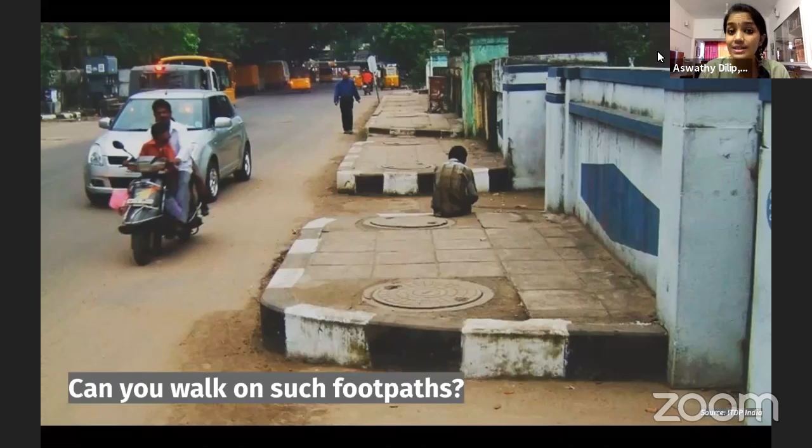So here, I'd like to put a poll to each one of you. The question we'd like to ask is: what are the reasons why most of you thought you may not prefer walking on the streets shown in the images above? Is it about discontinuous and broken footpaths? Is it about unorganized parking? Was it about the lack of sufficient lighting, or encroachment of footpaths by vendors, or just the lack of cleanliness? The results are coming up right now.

I really encourage all of you to take this poll. As I'm seeing, almost 85% of you believe that discontinuous and broken footpaths are one of the most important problems we need to take up. Next is the issue of encroachment on our footpaths, followed by the fact that they're unclean, and also the need to look at unorganized parking. Last but not least, sufficient lighting is also very important. Let me share the results with all of you.

Now, what if you looked at a street like this? What kind of imagination comes into each of your minds? How about walking on a street like this? Does it want you to stay here and spend a little more time out here? Stop.

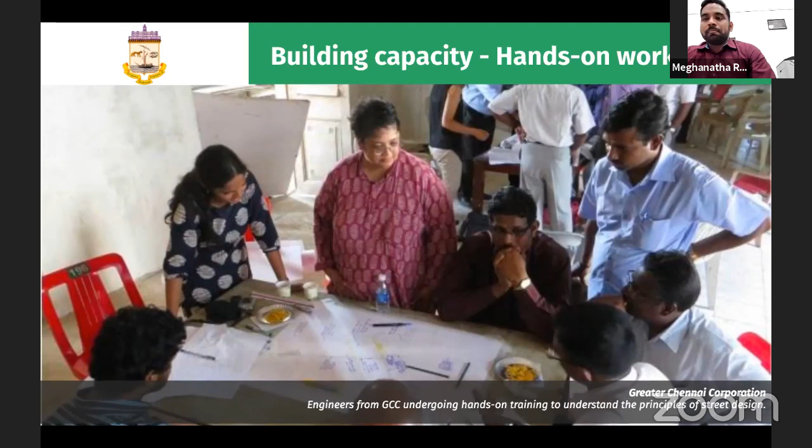Again, building on capacity building - the idea was to ensure it's not just consultants, engineers, contractors or builders who should understand the redesigning and reframing of streets. Our own engineers and officials should first have that capacity building and be sensitized about it. These are snapshots from that capacity building.

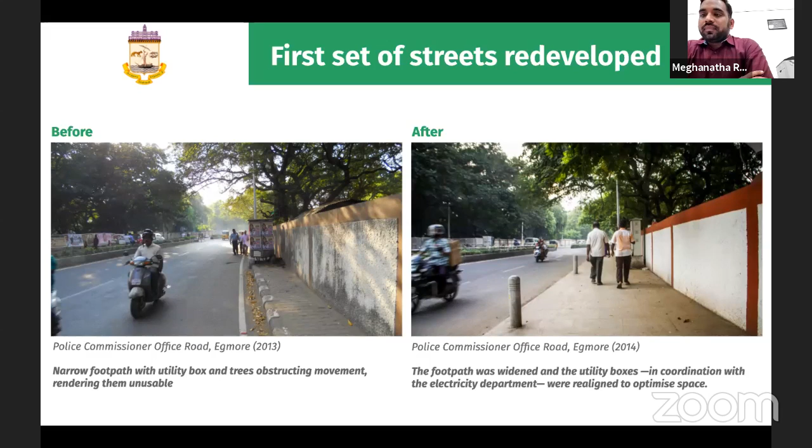Chennai, I must say proudly, has adopted the NMT - non-motorized transport - policy, and we are taking many steps and measures to fulfill our NMT goals. Since we adopted the policy back in 2014, we have covered almost 150 kilometers of streets that have been converted into complete streets.

One of the prime things we did was build people's support around our work. When we touch arterial roads, busy areas and business districts with set notions and conservative approaches to roads, you need to build support among the local public, so they are not just witnesses but stakeholders in the development of that area.

This is again about building support through the public - a snapshot from Mylapore, where we involved police, resident welfare associations and everyone. Another inbuilt concept along with the streets we develop is ensuring they are well connected to schools and access routes, creating safe roads to school, achieved again through community participation.

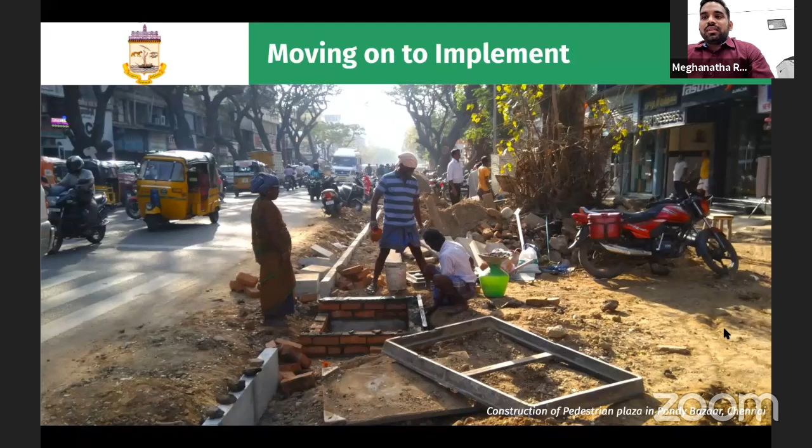This again at the same place, through negotiations, and then this is implementation. The phase when we started implementing it - you can easily see the way it was before. It was like the cars were almost near the shops. It was such a mix-up there.

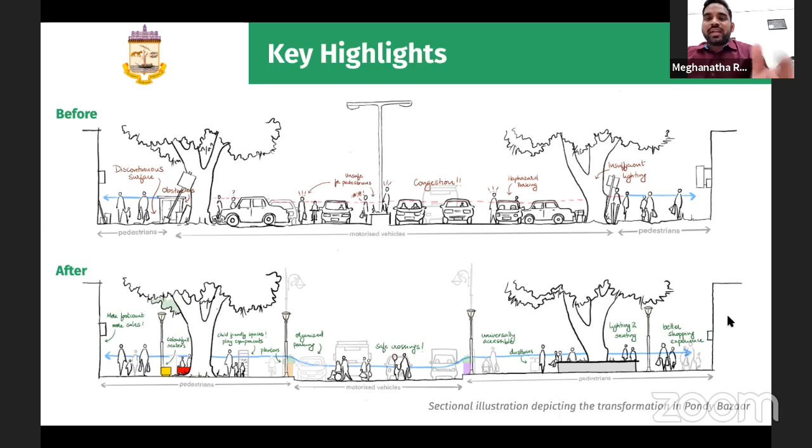But now everything is very defined. The path for the cars and vehicles is defined, and the path for pedestrians and citizens is defined very well there.

And of course, this is one thing we have always kept in mind: inclusive design for all. It should be something everyone should enjoy - all should have equal opportunity to go there and enjoy. We've also put in place a free shuttle service for all, with priority to people with limited mobility and all. It's running very successfully there now.

And vibrant street furniture again - that's another way to secure the streets. Otherwise, what would happen is we create spaces, people would come, and then people would encroach with petty hawkers and all. So the idea was to create these spaces so there won't be any future encroachment - play equipment, vibrant furniture and all.

So yeah, this is how you see it. If it is some festive season and all, this is like a must-visit place in Chennai now, with all its vibrancy and lighting. Of course, again, with tree cover and planters, as I said, it looks really beautiful. And again, with safer access to public transport.

And this is another thing which gels so very well with our concept of pedestrian design. This is towards one end of the pedestrian plaza - we have brought in the smart bike concept. We've all tried doing it ourselves, and it has been a fantastic experience. For the people coming in there, this is like an added advantage and attraction.

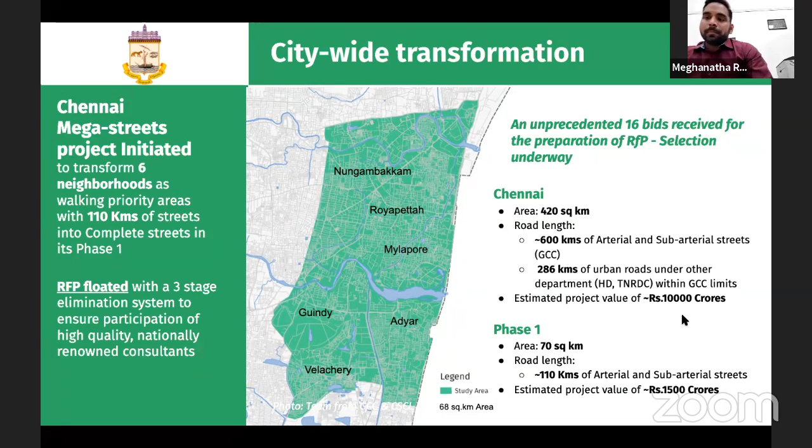One or two things I'd like to add: we've almost completed our proposals for the next 6 packages, 6 streets, 6 areas that we want to develop. We are bringing in quick wins wherein we can develop, but to begin with, as a pre-phase 1, we can develop a few, around 20-30 kilometers, in a big way.

As said in Pondy Bazaar's case, we brought in a pedestrian plaza, and many things came in along with it - for example, the smart bike. We're also coming up with an MLCP at the pedestrian plaza. This came out of the demand from the shop owners who saw the beautiful redesign of the entire street. This is how Chennai made it possible - it was clear public participation, citizen-driven and citizen-focused.

Thank you so much, sir, for showing examples of how citizen engagement is at the heart of this. At the same time, it's not just a few pilots, but actually transforming the entire city and taking systemic actions, like Kunal sir mentioned. It's great to see that in play. Next, I'd like to invite both Mr. Pradeep Bansal and Anuj Malhotra to present their transformation in Delhi. Over to you.

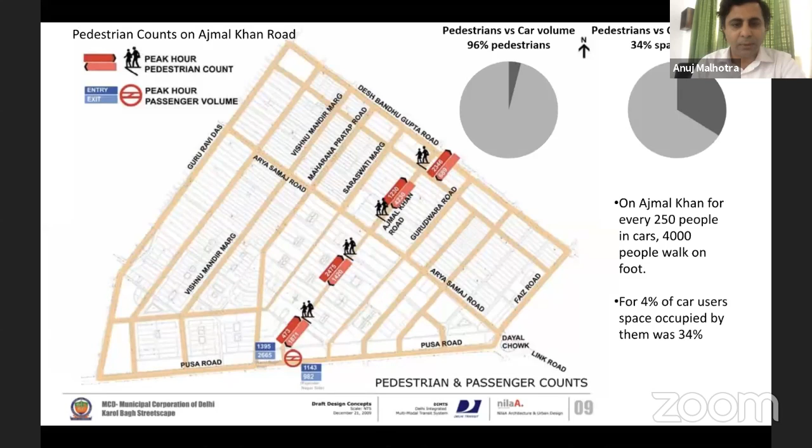This project report was done in 2009 by DIMTS and Nila, the urban design firm in Delhi. They worked out the figures and determined what needed to be done in this area. They found that Ajmal Khan Road, the prime artery of Karol Bagh, should be pedestrianized because 96% of people on that street were already pedestrians, and only 4% were in cars. Along with the proposal, they also worked out the traffic circulation pattern for the entire area. This was approved by the governing body of UTTIPEC and the Lieutenant Governor of Delhi in 2010.

Thereafter some trials were conducted, but for some reason it didn't go through. Then in 2019, North DMC took it up again themselves, and we thought we should first do a tactical implementation of this project, so that it has more buy-in from all the people, and we can bring in any modifications needed in the project.

To begin with the modifications, the first thing we needed to do - since this is a very old area with not much parking available - was to figure out where parking could happen, so the streets could be relieved of parking. All these new spots you see on the screen were identified - these are all the empty spaces, and some were given partly to parking, or the entire thing was given to parking, to multi-level parking lots.

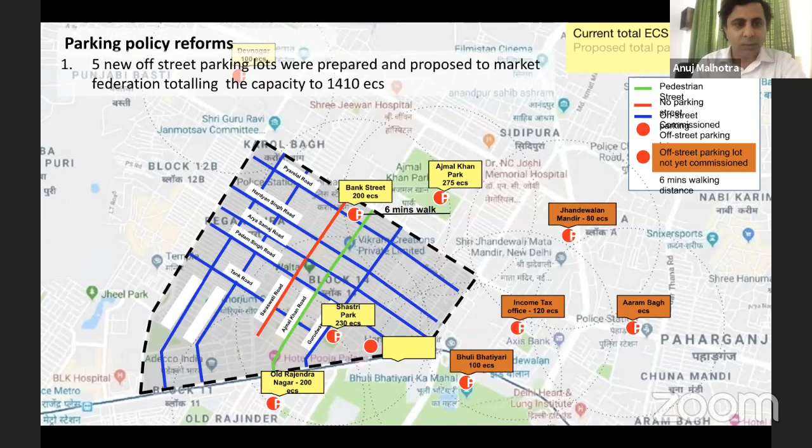After that, an MOU was also signed with the Market Federation. This is actually a huge change in policy on the North DMC side. Normally it's done by the department, but here the Market Federation was asked to manage parking in that area, so it was quite different in how it was done. The on-street parking fee was also increased from 20 to 40 rupees. These are pretty big changes.

The pedestrianization of Ajmal Khan Road, which we started with, was actually a vision presented in 2009. We began implementation with the entire team of PWD, North DMC, and traffic police. A combined team of around 50 officials worked on site through the night, for 2-3 nights initially, and we made a major transformation in the first night itself.

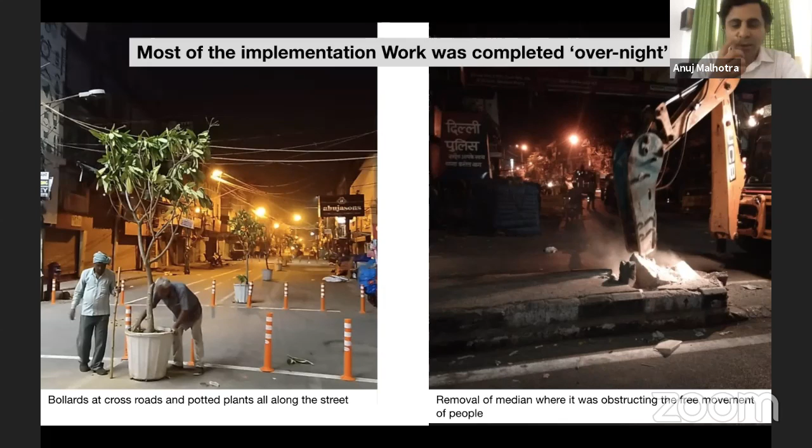People had never believed in their lives that this could happen on Karol Bagh, on Ajmal Khan, because all their lives they had seen this kind of street heavily congested. It turned into this with minimal intervention, which is only paint, some potted trees, and bollards fixed at positions. So the street was transformed by a simple tactical method.

This was not something done temporarily. The tactical method is still in place, very much in existence. It's been about a year now, more than a year actually, and the street is working perfectly.

It was such a joy to see how people started actually coming to the street, sitting next to the shops, with children and grandfathers bringing the children out. This was quite a sight. Elderly women could bring their wheelchairs, and with the benches, it became a space for everybody, irrespective of their income groups.

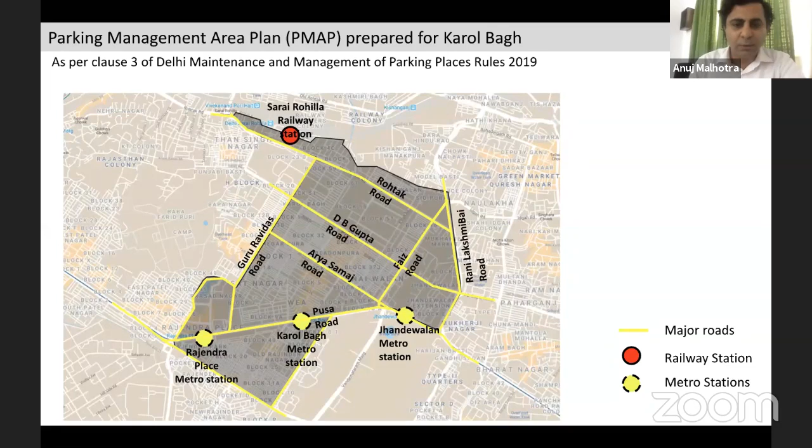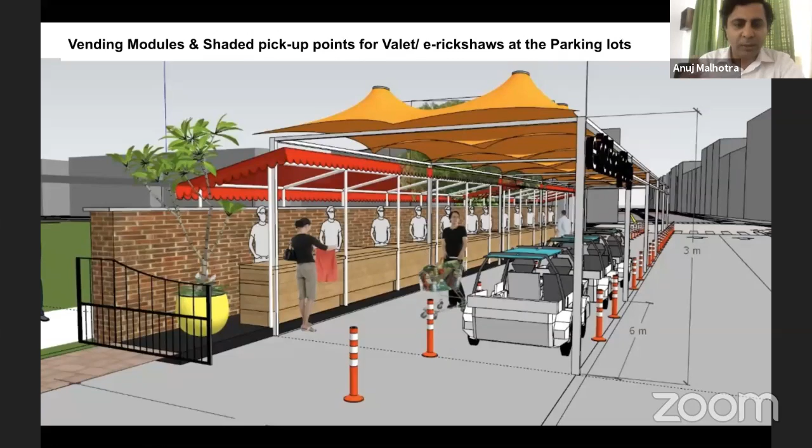Slowly we covered the entire Karol Bagh area for our intervention. With the Supreme Court asking us to look at a parking management area plan, Karol Bagh has now prepared a parking management area plan for daytime and nighttime parking. We also looked at the vendors, did conceptual diagrams, and implemented it. There is a town vending committee which is being kept in confidence. We have identified around 300 spaces all around Karol Bagh where vendors will be allocated, and that work is also going on in parallel.

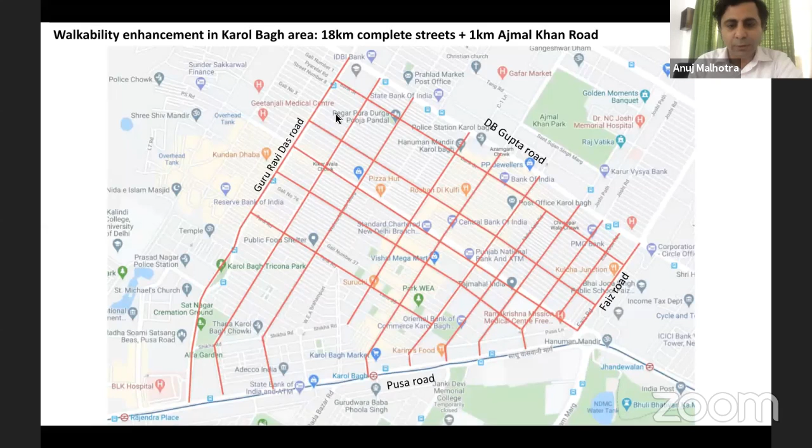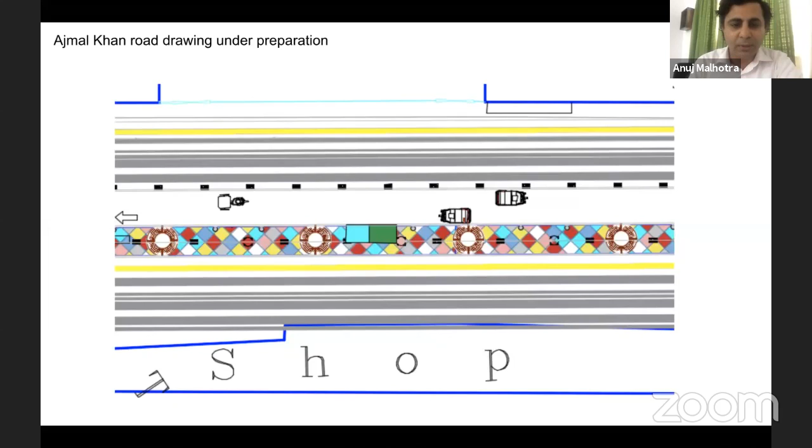So this is the plan for the streets. There are about 18 kilometers of it. This is Ajmal Khan Road, and now it will be a pedestrianized street. We had a beautiful art festival by the students. About 800 students came to paint this, and we are looking at the same pattern they created to make it permanent and part of the street design. So that will come, and you can see the sections which were done.

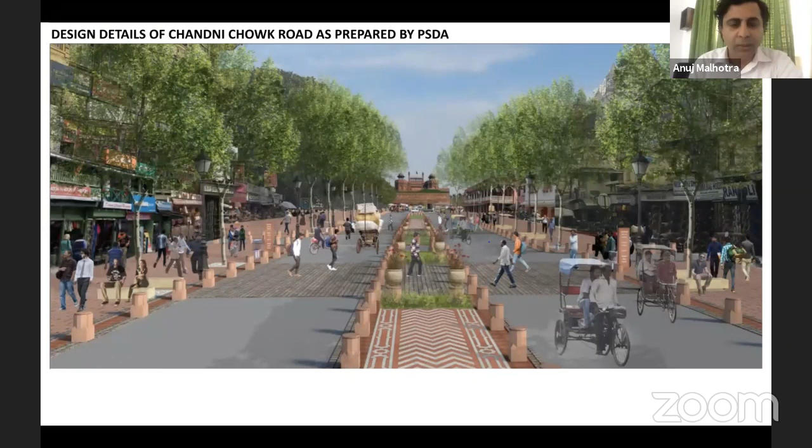So sir, isme bhi, now Chandni Chowk, as you know, is a very large area, and here the first project which was taken up is the pedestrianization of the Chandni Chowk road. This was done by the late Pradeep Sachdeva sir, who is a great urban designer based out of Delhi. He's no more now, but his legacy has been left. Now we have the Chandni Chowk road, which has been transformed into a beautiful pedestrian plaza.

And this is the transformation we are all aware of. But now, in North DMC, what we are doing is trying to integrate the transformation of Chandni Chowk road to the entire Chandni Chowk area, which means the traffic circulation, the pedestrian circulation, the goods traffic circulation, all of them will be taken care of for the entire area. So I'll just run through the slides.

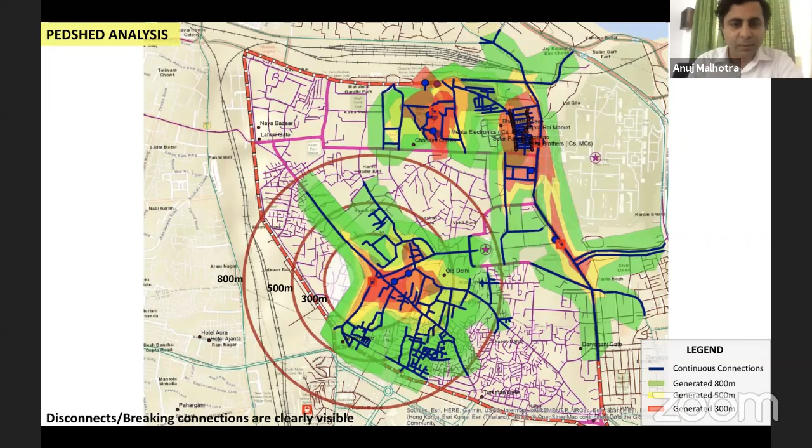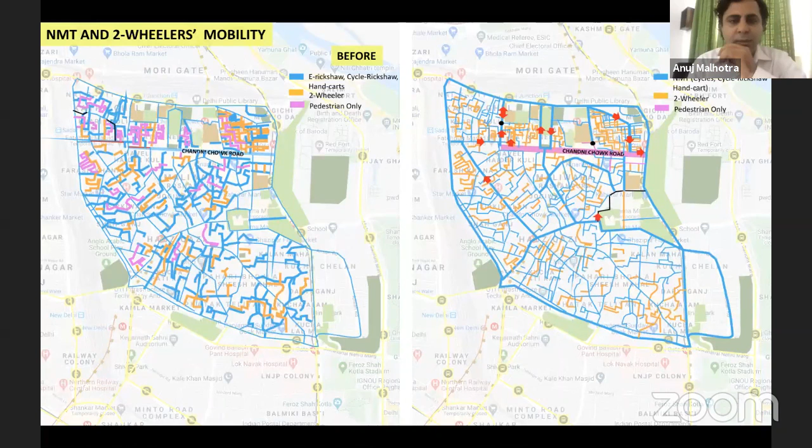So running through this, you can see the non-motorized two-wheeler mobility, the three-wheeler mobility, the before and after of four-wheelers and trucks. This is a composite map. All the blue roads you see are entirely pedestrianized streets, full NMT streets, while all the other streets of different colors are where the pedestrian movement has been widened to make it more walkable for the entire pedestrian area.

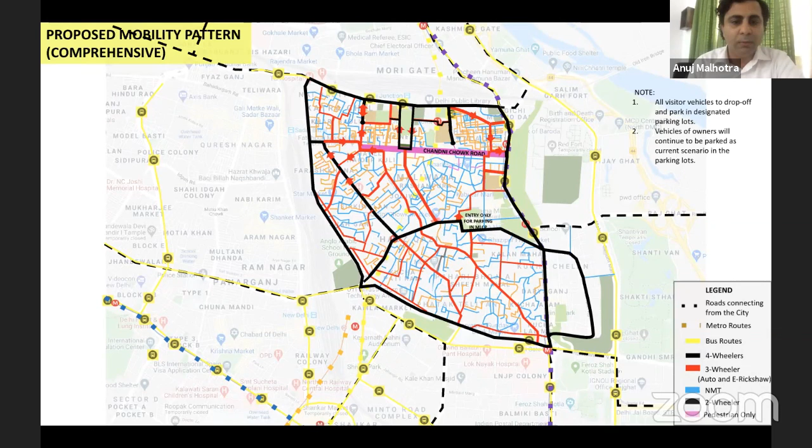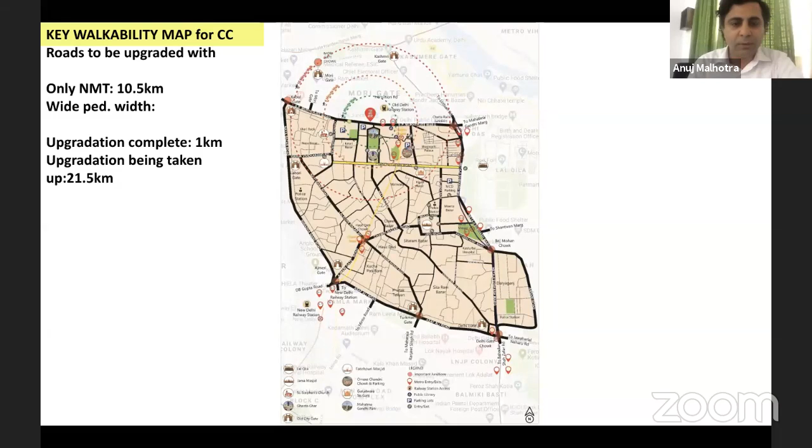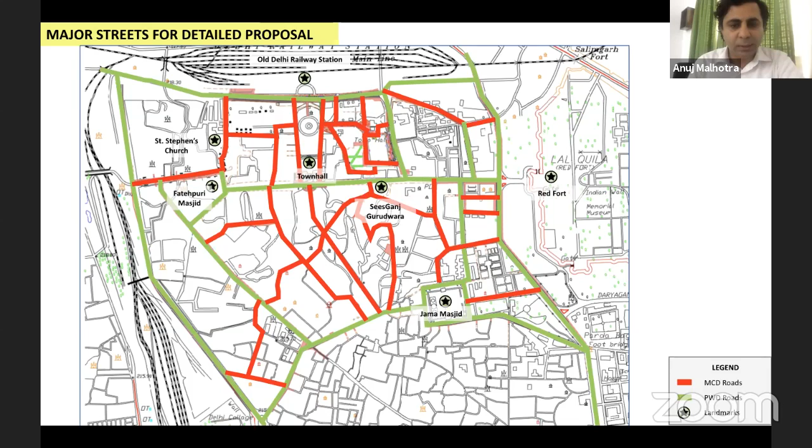So in the key walkability map for Chandni Chowk that we have just prepared, the only NMT streets will be around 10 kilometers, while the other streets will be around 21 kilometers, where walkability enhancement will take place. This is the composite map: the red streets belong to MCD, the green ones to PWD, and street designs have been prepared for all of these streets, with implementation now underway. So nearly 30 kilometers of streets will be getting transformed bit by bit in Chandni Chowk.

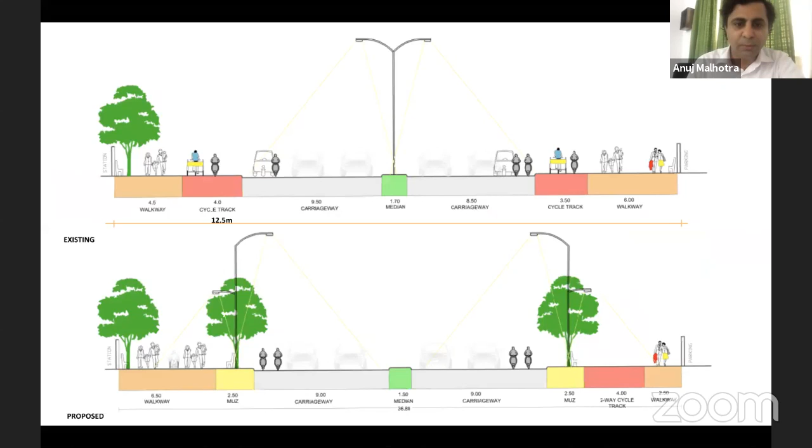The transformation that you all have shown is truly inspirational, especially because it is very much in line with the Streets for People challenge, where we are really encouraging cities to first try out quick and innovative measures, but then keep them for long, just like in Karol Bagh, and then slowly look at how it can be transformed into permanent interventions. Some of the very important pieces were different departments coming together, such as traffic police, introducing organized parking with priced parking, and engaging with students for designing this area. All of these are bang on for the Streets for People challenge. Thank you so much for sharing that.

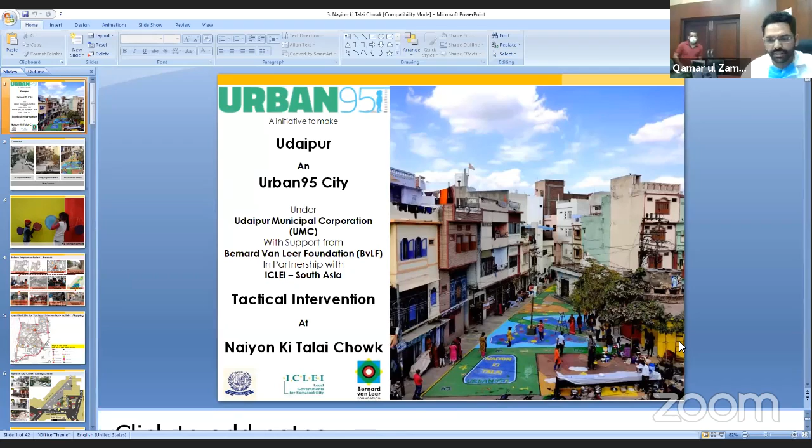So this was a pilot we did in the old city area, a very congested area, and we tried it as a pilot. Pre-implementation, major challenges were that parking was very haphazard, with street lights and poles everywhere, as you can see in the first photo. The second photo shows what we did during implementation, and the last shows what we achieved.

This is one thing we implemented on the wall of the temple. It was just a very shabby wall, and we colored it, then put springs on it so children can play. So this is how we did it.

First we did the site selection, then activity mapping, and then looked at what all is surrounding the site. Then we did stakeholder consultation with the commissioner, deputy mayor, mayor, and everyone from the city, with colleges and students and Anganwadis, and with vendors who can give us the material.

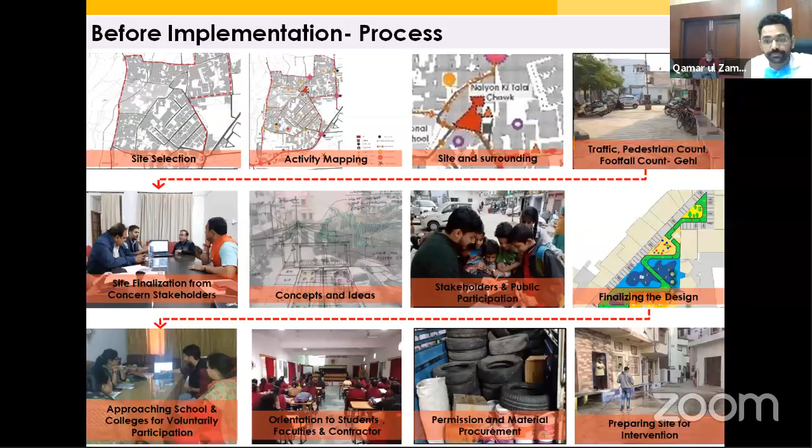This is a general plan of this area in Naiyon Ki Talai. This area is besides the Pichola Lake, one of the famous lakes of Udaipur, and this is just a neighborhood inside the old city. Whenever you move through this area, it is very difficult to move.

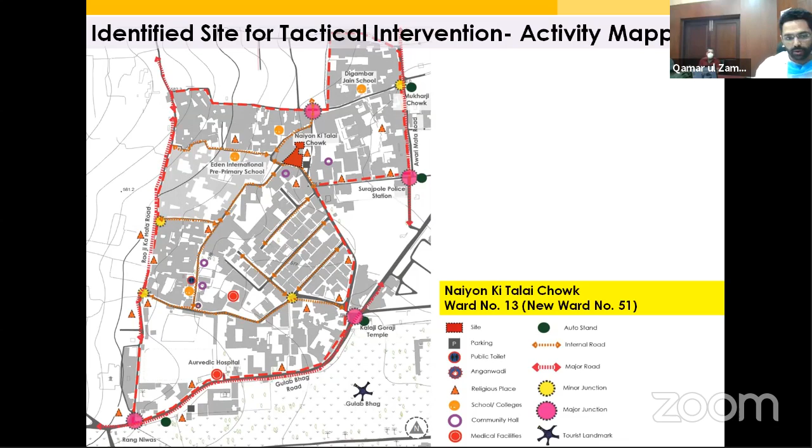Now if you go to that area, it is properly planned, and this is how we selected this site. As I showed in the first slide, there were electric poles in between, and that's how we came up with this street in the Smart City project. We have another project, the integrated infrastructure project, through which we made this street pakka, and now it came up as a concrete street.

But what we missed was removing these poles, arranging the parking, and figuring out how we can actually beautify the street. That's how we came up with the concept of Ghar, Angan, and Sansar, and how we can integrate all these things.

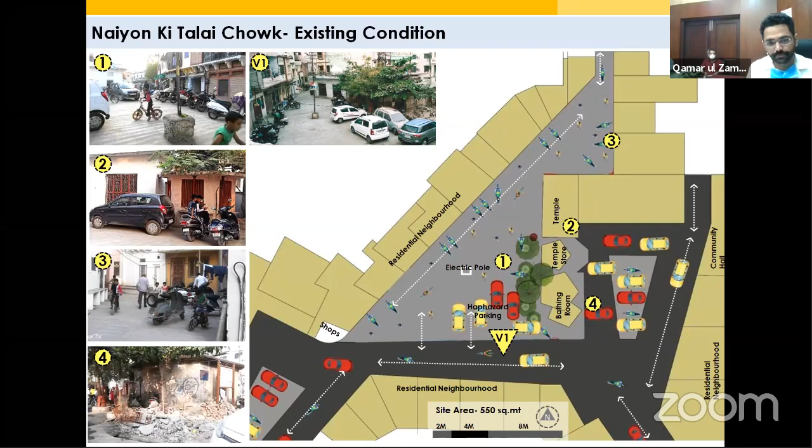So this was actually a photo if I show you. Residential buildings are there, and a lot of debris was there. You can see the parking. So these are the challenges which we actually identified.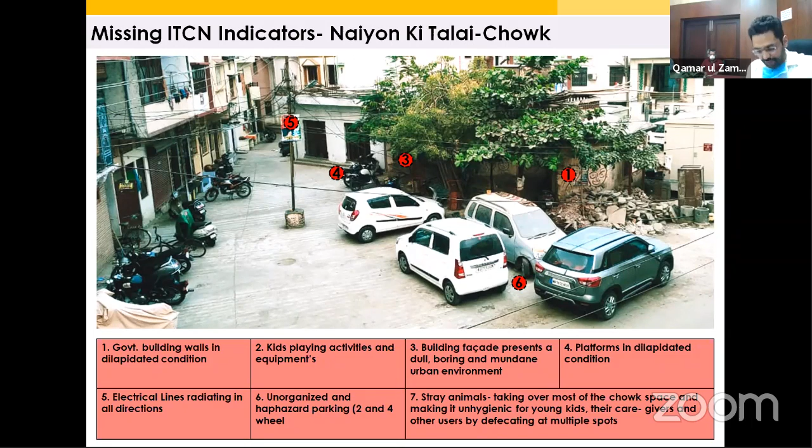So this was the plan. If you can see to the extreme right, it is a green jungle type theme. Then the green one is the river flowing, and to the extreme, where organized parking is written, we have hills and mountains. Then moving down, along the river, there is a play area and a pool area. So it's just a theme which we took: at the top, it is an imitation of jungle, then a learning track and playful tracks.

Then towards the right, what we did was there was a temple, and the temple walls were really shabby.

So we actually painted it, and fixed some fixtures for the kids so they can play with it. Then there are some lawn games, interactive games for kids, and local games which we put in there, like Langdi Tag or other games we play in North India.

And this is how we put spinning wheels on the wall of the temple. And to one side we organized the parking so that it's also included in the plan.

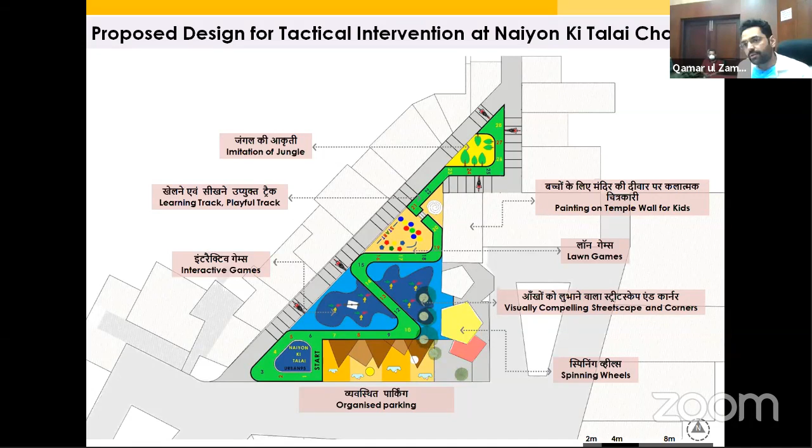So this is the stakeholder consultation with the commissioner, the deputy mayor, mayor, chief engineer, and stakeholders of the area. You can see the pictures, done during the day and during the night, to see the challenges we face in the locality and what is needed.

So this is with the students and volunteers we were trying to include for implementation. This is the actual implementation which started. This was the form before the implementation, and this is site cleaning and everything we did.

So these are the four major things: transforming the Chowk into a vibrant, safe, interactive and engaging space. Second, community level interactive space, where old age people and ladies can come to the street, sit, enjoy, and interact with each other. Third is learning-cum-playing, where students can learn from their games. And the fourth is organizing the limited space for multiple uses.

So this is during the implementation. We did most things with volunteers, and on the left you can see on-site orientation of the students and then on-site implementation. So this is how we did it.

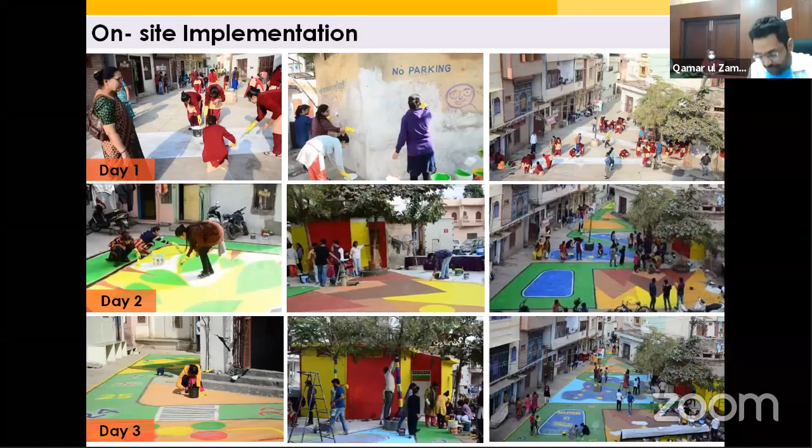So this is something we did with ICLEI and BvLF Foundation. This is on-site photos of the team. This is what we achieved finally.

So I'll just go through: learning track is there, organized parking is there, spinning wheels are there, lawn games are there, interactive games are there, imitation of jungle is there, painting on the temple wall for kids is there, and visually compelling streetscape and corners is there.

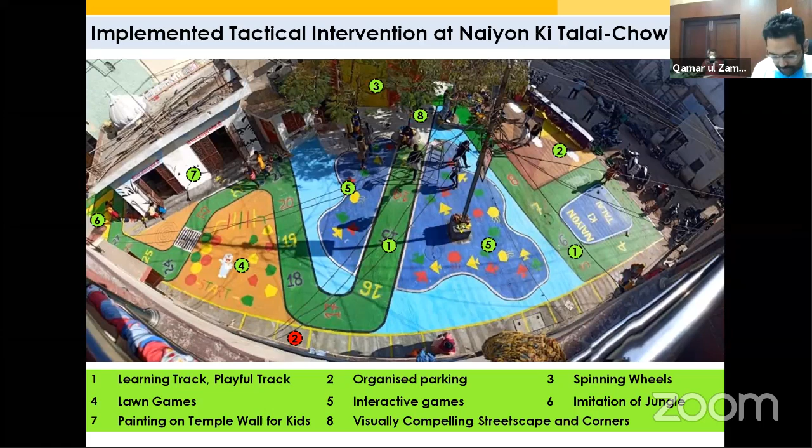So I'll just skip ahead. This is the media coverage. This is post-implementation, showing how kids are enjoying it. And this was mainly the impact assessment of the street.

So these are the public discussions held after implementation for impact assessment. You can see how the street came up and how people are enjoying it.

So these are the results we found for the 4 interventions. First, for transforming it into a vibrant space, 92% of people were satisfied. 77% were satisfied that it is a community level interactive space. 85% for learning-cum-playing, and 64% for multiple use.

This is the stakeholder interaction, and the interaction with different officials and public figures. This is the sensory mapping survey. This is on-site photo documentation. This is what we can see before and after.

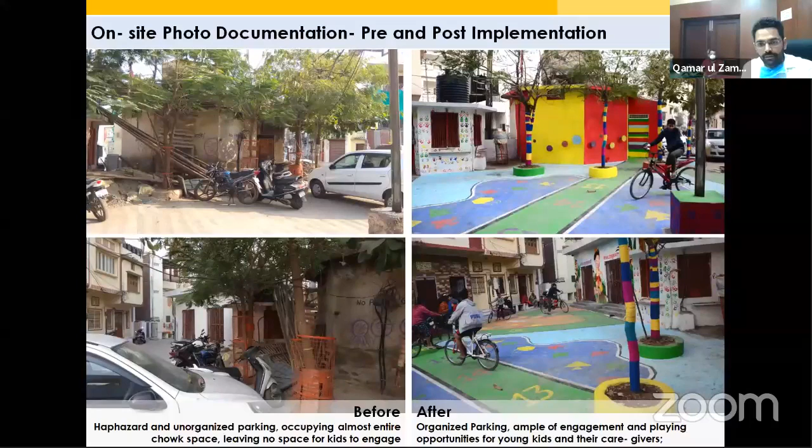Just rushing through the photos - this is the temple, and this is what we achieved. This was the first pilot which we did.

Now we are planning further, and with this Streets for People Challenge competition, we are trying to extend it to other roads and major roads of the city. Thank you so much.

Thank you so much, sir. It was really nice to see your intervention in Udaipur, especially because you've really focused on some of our youngest citizens, who most often get left off when we think about planning for our cities, and you put them right in the heart of your transformation. It was fantastic to see this.

Now, while we've seen this great work by all 4 panelists, we must know that while they might not have spoken about the court cases and pushbacks they probably got from stakeholders, invariably there are these pushbacks that we have to proactively take a stand and engage in negotiations with all our stakeholders. So today we don't have time for a question answer session, and we will quickly move to the presentation of today.

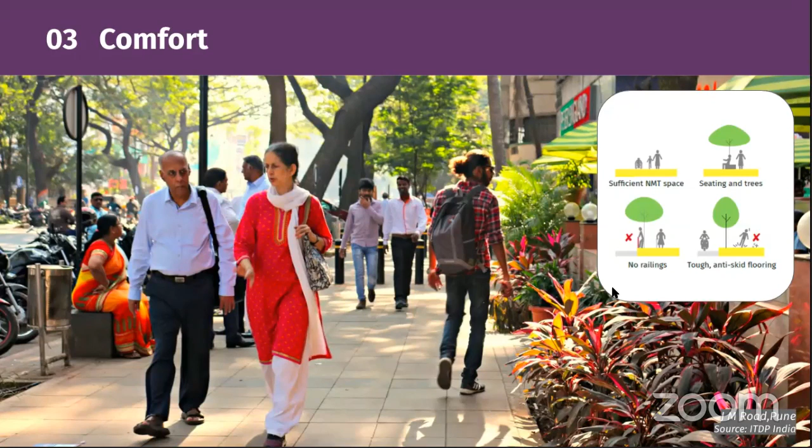Fourth, are we being sensitive to the local context? Are we engaging with local people, seeing what kind of activities are already happening in that area, and bringing them into the design rather than placing something alien in that context?

Fifth, are we making it livable? Are we bringing in a variety of elements like play elements? Are we ensuring this is inclusive? Do we have active edges? Do we have street vending integrated with the whole idea? You saw many of these included in our four example cities earlier.

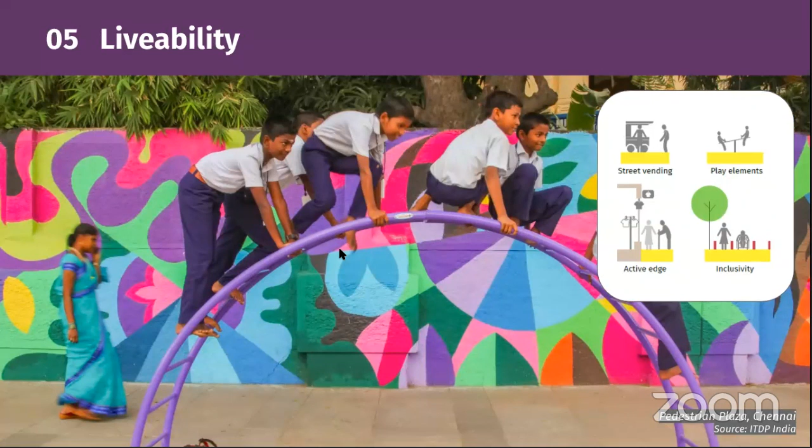Last but not least, are we ensuring that through the process we are also ensuring environmental sustainability? Are we creating a better microclimate? Are we using sustainable materials for this, etc.? While this challenge is about creating these ideas through tactical urbanism, which are quick interventions, the eventual goal is that after establishing the designs, you also take it to the next level and make it permanent using all these other components as well.

Those are the six principles that you should keep in mind. And when you do that, you actually get streets that are safe, healthy, and happy for all.

So what is this challenge approach? The goal here is not assuming that you know everything, but instead test, then learn from the tests. And then once you have those insights, use them to scale in a much larger area, potentially across your entire city.

So the idea of test, learn, scale is something our cities in the Cycles for Change challenge have embraced. It's great to see this process where rather than assuming we know everything, we are instead working with citizens, trying out various ideas, learning from them, and eventually making sure this becomes the new norm and scaling it. So the challenge has two stages, stage 1 and stage 2.

In stage 1, cities would not only test pilots, but along with it, they would also create a plan for scale up. Cities shortlisted at the end of stage 1 would graduate into stage 2, and get intensive support to actually do the scale up.

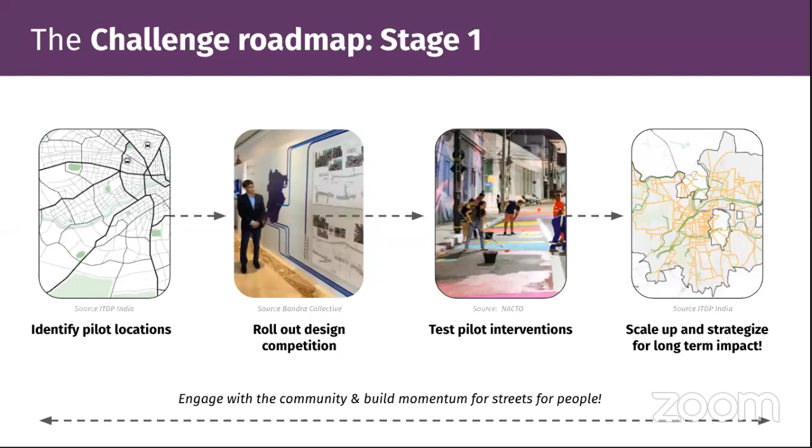Today we are going to focus primarily on the very first step, which is identifying a pilot location, or not one, but actually 2 pilot locations. What do we mean by these 2 pilot locations? Let's look at them. So what qualifies as a pilot?

A pilot would include 2 components. One is a flagship public space project, typically an area with very high footfall. It could be a big market area in the city or a large transit hub, where you would look at substantial pedestrianization. You saw some examples of that kind today from Delhi, Amritsar, etc. These are key market areas or a heritage precinct, or potentially a transit hub, where you would substantially pedestrianize that entire area.

The second is about creating livable neighborhoods. Not every part of the city has high footfall - they're not market areas, but residential neighborhoods. They might be mixed use, but primarily residential. So what can you do to make these neighborhoods also streets for people, where you have elements of livability and safety, all the principles we spoke about? How do we make that happen?

So a flagship typology could be a market, real estate, or retail area, or a heritage area - and typically heritage areas also tend to have markets in that precinct. Second typology is a transit hub. And third, maybe you have a different typology we haven't thought about - please send us your suggestions so we can include such typologies in the possibilities. In terms of neighborhood typologies, we have 3 in mind.

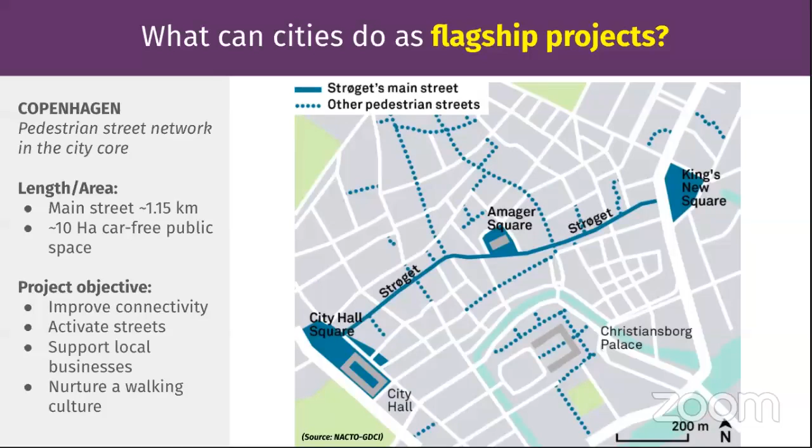And with the goal of improving connectivity, activating streets, supporting the local businesses to bloom and nurture a walking culture in the city. And subsequently now, over the last few decades, Copenhagen has been creating pedestrian-friendly environments across the whole city. Like you can see on the left is this main arterial which was cutting through the old city, which is now not only completely pedestrianized, but they have a whole series of other smaller lanes, by-lanes, which are also completely pedestrianized, or walking and cycling only in these areas.

The second kind of flagship project that I mentioned is essentially transit hubs. Transit hubs are where a lot of people are walking. They might be coming to the transit hub to pick up a connect to a public transportation mode. Oftentimes they are also intermodal facilities, where you might get off a bus, get into a metro, or get off from one bus to the other bus, or change from a bus to maybe a smaller vehicle like an IPT, a micro-mobility mode. So what could you do in that area to facilitate this multimodality, but also create public space?

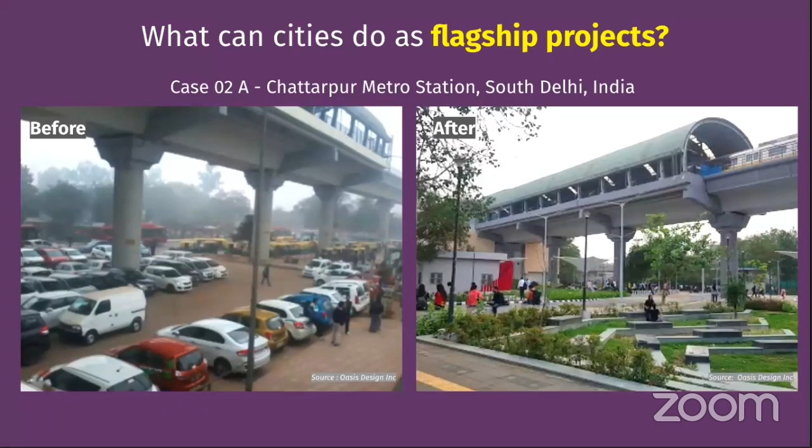This example is from Chattarpur Metro Station in South Delhi. Delhi has been doing some great work in the whole public space arena. What they've essentially looked at is an entire catchment area of about 7 kilometers. What they have done so far is essentially the station area, about 300 meters in length, but they have plans to now expand it to the whole catchment area and see how they could create a truly walking friendly environment to access public transportation. That's the other flagship.

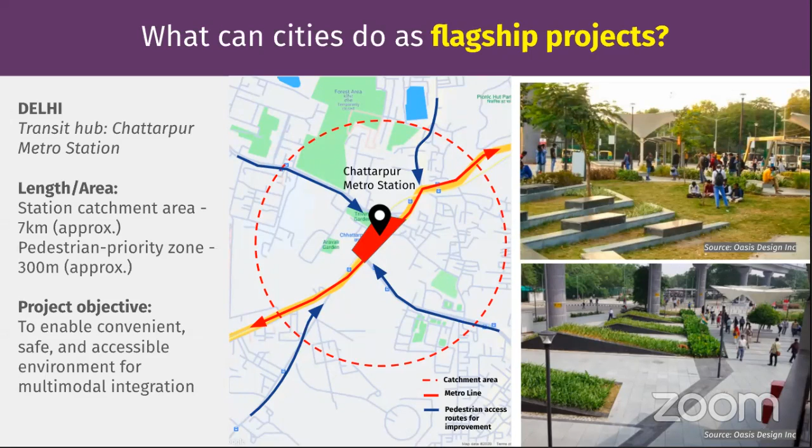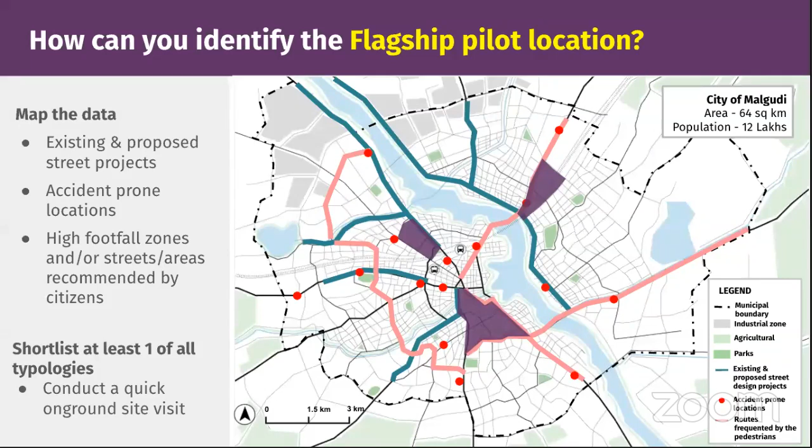Let me quickly go to what and how would you identify what your 1 flagship location might be. So maybe you're already working on some cycles for change corridors. Now start looking at what neighborhoods also you could choose. You might have a couple of options and look at a place where it might be relatively easy to implement, but also has high impact, strong citizen support. And when I say citizen support, in a flagship especially, it's essentially market associations locally and others who would be there to assist you, support you in implementing it, and the potential to cater to a wide demographic.

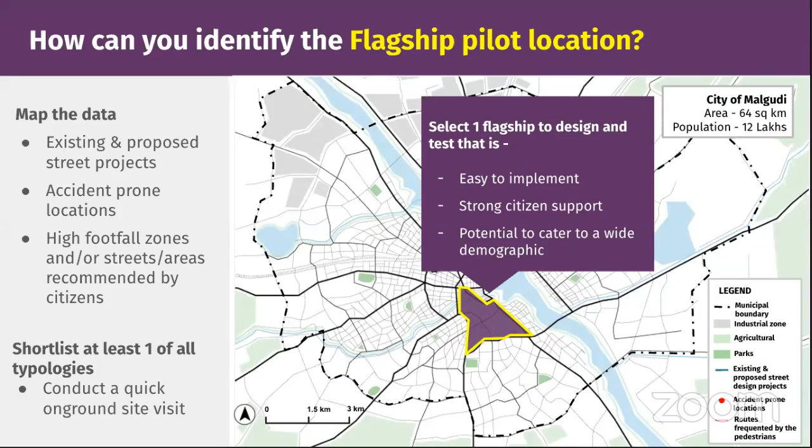The second typology I spoke about was neighborhood locations, which are localized in nature. Streets are relatively narrow, with a mix of age groups, similar to what Udaipur showed today, as against Delhi, Amritsar, or Chennai, which were more the flagship variety. In this case, you're looking at a neighborhood.

Make sure you're looking at schools, local shops, bus stop access, local parks, and how you would integrate them with the street network to make it safe for people and pedestrians. Look at mixed income neighborhoods as one typology, resettlement colonies, unplanned income neighborhoods. Try to identify at least one of each of these typologies. While you would pick only one for now, keep in mind that eventually you should look at all these typologies in the future to transform.

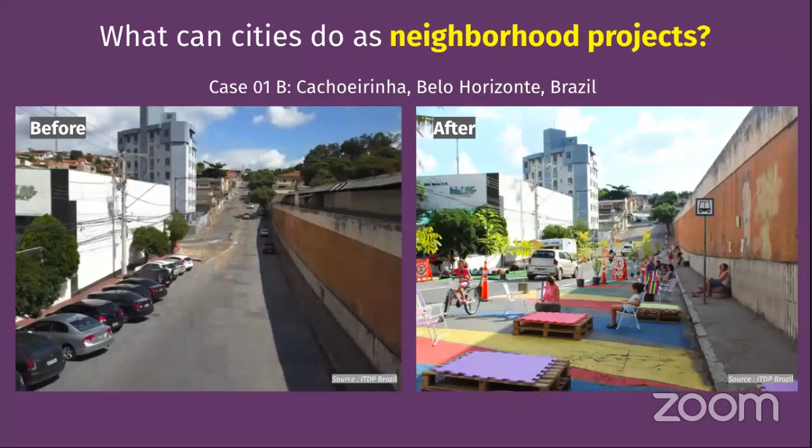So again, a few examples of what cities have done. This is the case of Belo Horizonte in Brazil, where they took a dead area of a neighborhood and started transforming it, which has a school area in the locality. They made sure they were doing this with the local citizens so they are part of the development of the design itself. The area is not only safe during the daytime but also at nighttime, because of the kind of activities they've been organizing to make it a nice place to be.

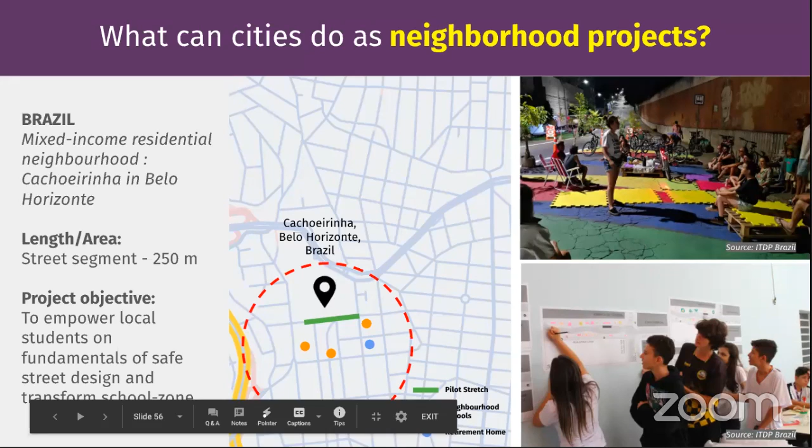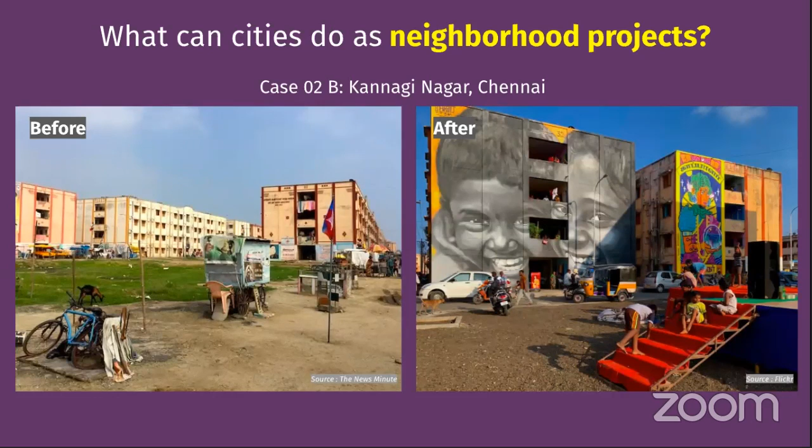The second example is one of these resettlement colonies in Chennai, in the south of the city, an area called Kannagi Nagar, where the area was a dead space and quite dangerous. Through the use of art, that whole area is being revitalized by combining art with public space. It's an area of about 1.5 square kilometers, and they're looking at how to use art as a tool to create a vibrant and accessible public space.

Again, they have various ideas, and the community was engaged in the process of developing them. These were put up as an exhibition, and using the learnings from that, they took it forward to create something more permanent, so the whole area becomes a nice place to live in.

The third example is from Indonesia, looking at a very low income neighborhood within the city, essentially a slum, and how they managed to transform that area with simple things like color and small elements, getting local citizens engaged in the process and creating a sense of ownership. Now this whole area has become a destination of sorts. Even though it was meant for the locality, other people are starting to come, and it is revitalizing the whole neighborhood.

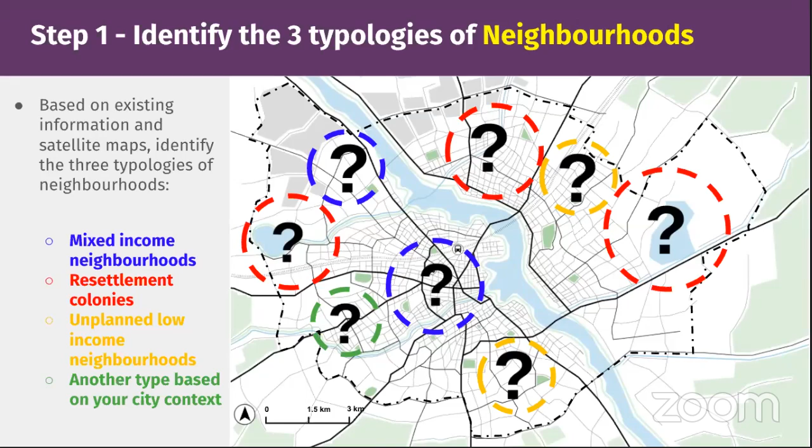So how do you go about identifying these typologies? Start looking at what options you have. You might have a few mixed income neighborhoods in the city, some resettlement colonies in the periphery, some unplanned low income neighborhoods within the city, or another kind of typology that you could come up with that we may not have thought of—tell us what it might be.

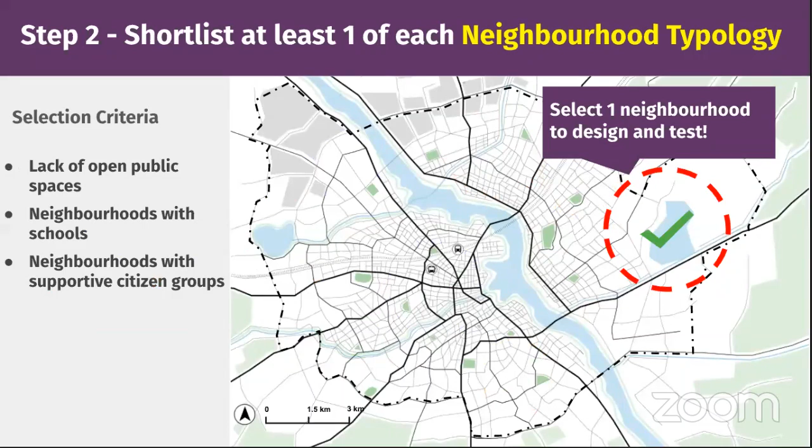Look especially at the lack of public spaces right now, neighborhoods which have schools so you can make the school precincts safer, and neighborhoods where you have supportive citizen groups, and start doing a pilot there. With one neighborhood, do the design test and take it forward.

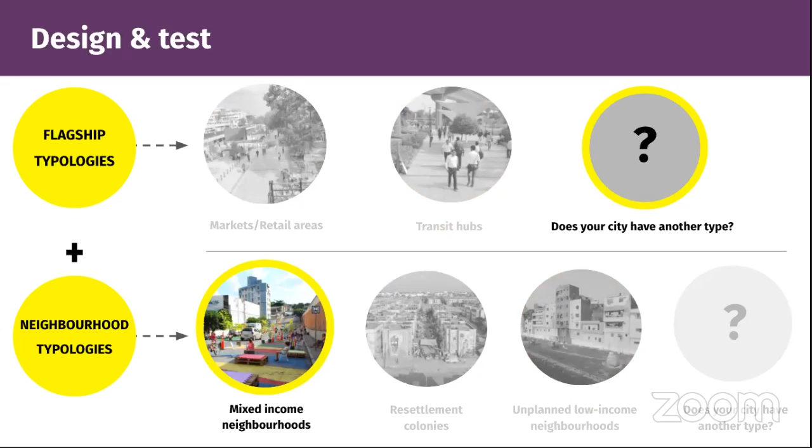Let me quickly summarize the pilot selection. You have to essentially identify multiple typologies, but start by choosing one each. It could be a transit hub and an unplanned low income neighborhood, or a mixed income neighborhood with another flagship typology we've not thought about, or a market and retail area, maybe in the heritage zone, along with another neighborhood typology. So you need to do at least one each of a flagship and a neighborhood typology to be eligible to go to stage 2.

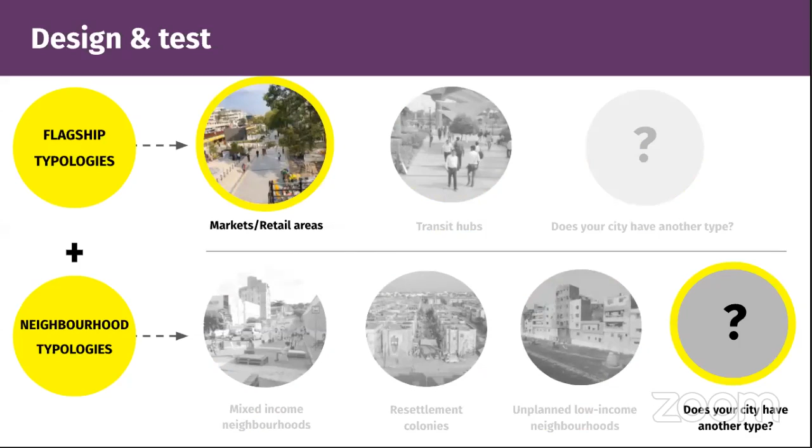What would the next workshop be? Remember, between now and the next workshop in about three weeks, you would identify the pilots. In the next round, we will guide you on how to roll out a design competition to engage local designers, students, and others to bring great design ideas, as a means to get design ideas to implement on the ground for the pilot implementation.

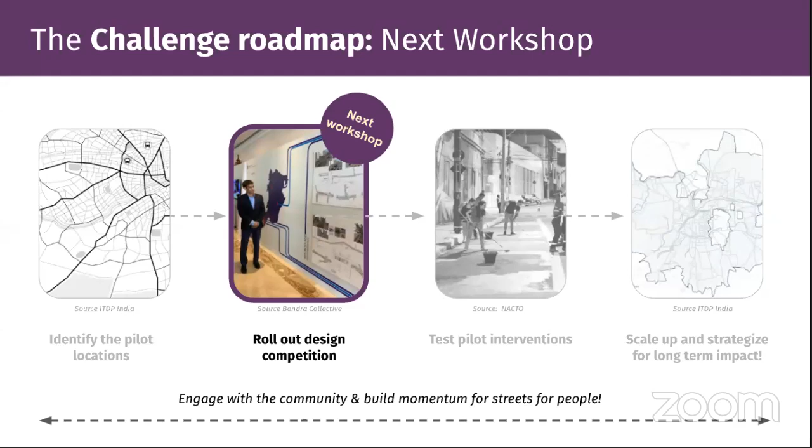So that's where we are. Between now and the next workshop, you would identify the pilot locations and start engaging with citizen groups so that this becomes a collective process rather than you doing it yourself independently. So that brings me to the end of this section of the presentation of this session.